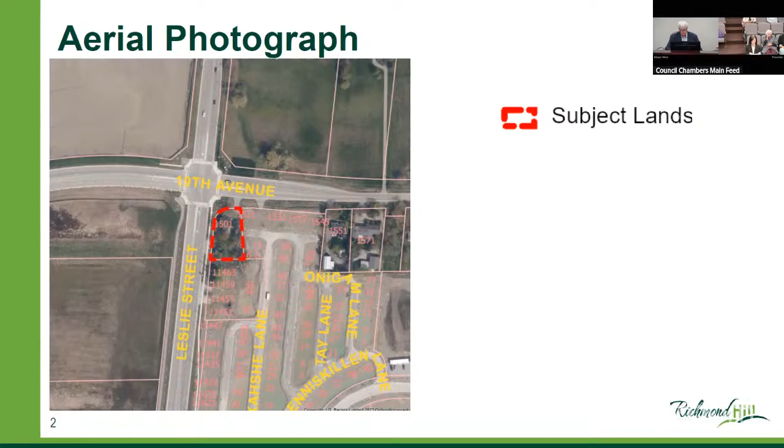The lands are currently designated Employment Corridor in accordance with the North Leslie Secondary Plan Area, which is intended to accommodate a range of industrial and office use developments.

However, notwithstanding the above, the North Leslie Secondary Plan provides for medium-density residential development. The applicable policies include permissions for a full range of residential types, including single detached, semi-detached, duplex, triplex, quadruplex, block townhouse, and back-to-back townhouses. Further policies within the secondary plan permit live-work build form within the mixed-use commercial/residential designation. With respect to current zoning, the subject lands are zoned agriculture, A1, under zoning bylaw 2523-86 as amended.

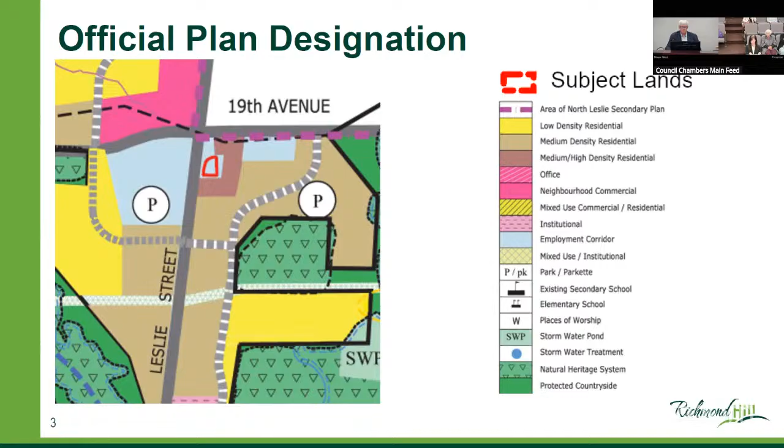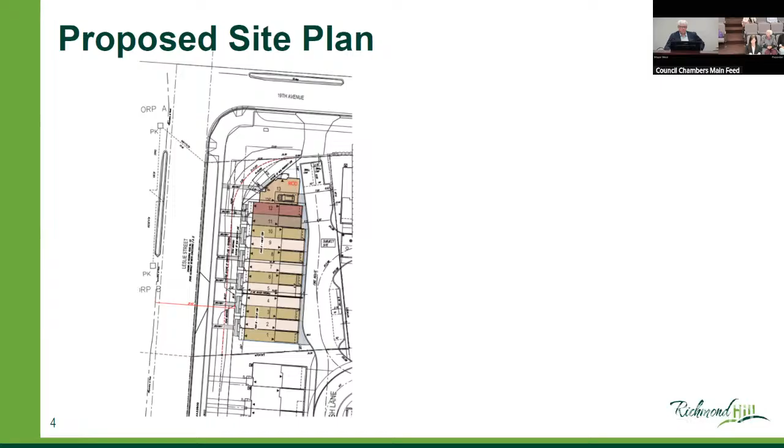Through these applications, the applicant is seeking approval to permit a medium-density residential development consisting of 13 three-story townhouse units on a private common element condominium road. Vehicular access to the subject lands is to be provided via a connecting driveway from the abutting Leslie Richmond Developments subdivision.

The applicant's official plan amendment application seeks to amend the policies of the North Leslie Secondary Plan Area to redesignate the lands to medium density, to permit medium density residential uses in the form of stacked townhouse dwellings that include live-work permissions, and also to increase the maximum permitted density within the medium density residential designation from 60 units per hectare to 95 units per hectare.

The applicant's zoning bylaw amendment application seeks approval to rezone the subject lands to Multiple Residential 4, RM4, as amended, with site-specific provisions to implement the development proposal.

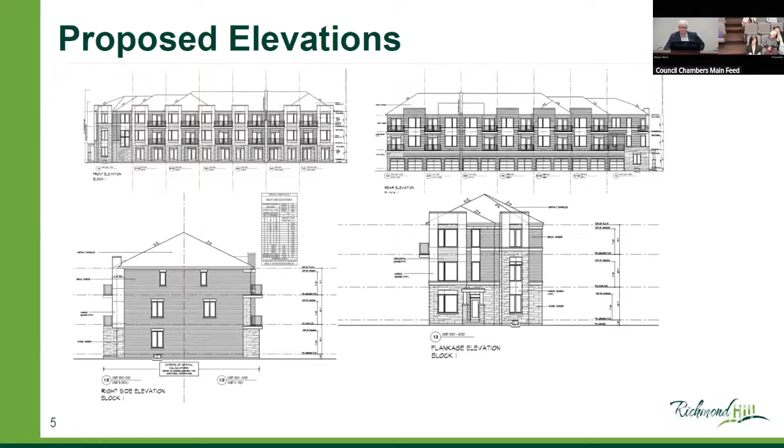It is noted that related draft plan of subdivision and draft plan of condominium applications have also been submitted in conjunction with the OPA and ZBLA applications. The proposed draft plan of subdivision, if approved, would result in the establishment of 2 separate parcels: 1 condominium townhouse block and 1 regional road widening block. The proposed draft plan of condominium, if approved, would serve to establish common element condominium tenure.

Staff have circulated the applications to internal departments and external agencies for review and comment. The purpose of the report is to provide council and the public with an overview of the applicant's development proposal, and it has been structured for information purposes only, with a recommendation that all comments be referred back to staff for consideration. Thank you.

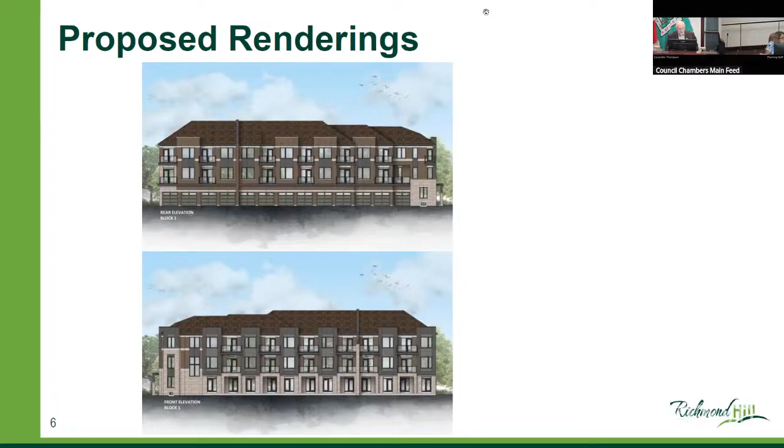Okay, thank you. Anybody else? Okay, seeing none.

I am a little concerned about the employment land issue, but can you clarify for me - in order for them to convert this from employment land to residential, they don't need to go through the region anymore because that's out of the question. So it's completely up to us then, is that correct? That is correct.

So the land across the street with the P on it, I assume that's something we're contemplating at some point, but it's actually designated as employment as well. The P on the west side of Leslie, that's where the community center is going to be. So that one's been considered, not going to be employment lands. The only remaining parcel is on the south side of 19th, a little further east. And that's not viable as a... okay. All right, that's fine.

Well, I appreciate the comments, I appreciate the input from you, sir. Thank you so much. We'll have this referred back to staff, and staff will continue working with the applicant to come up with something we can look at in the future. So we have a motion in front of us then - all those in favor, opposed - that carries unanimously. Thank you very much. The next item tonight, and the last item.

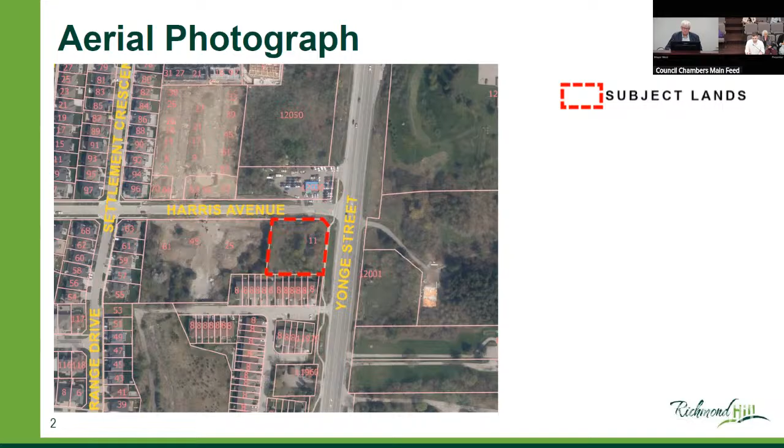The land supports an existing single detached dwelling, which is proposed to be demolished to facilitate the development. The surrounding land uses include an existing used car dealership to the north, which is subject to development approval for an 8-story mixed-use development, Summit Golf and Country Club to the east, existing townhouses to the south, and medium-density residential currently under construction to the west.

The lands are designated regional mixed-use corridor in accordance with the city's official plan. The applicable policies allow for medium and high-density residential land uses, as well as a full range of commercial, retail, and office uses. Development within this portion of the regional mixed-use corridor allows for a maximum building height of 6 stories with a maximum density of 2 FSI.

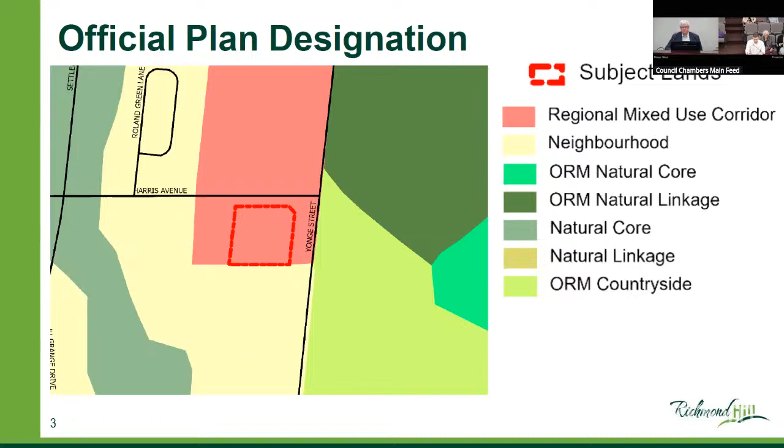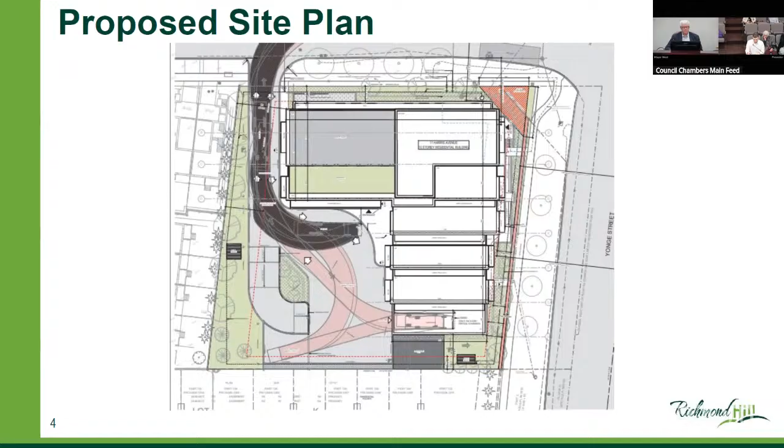Through these applications, the applicant is seeking approval to permit a high-density mixed-use development comprised of 10-story apartment buildings with 119 dwelling units, approximately 269 square meters of commercial space at grade, indoor and outdoor amenity spaces including a rooftop amenity area, and 3 levels of underground parking.

The applicant's official plan amendment application seeks approval of site-specific exemptions to the regional mixed-use corridor designation to increase the permitted building height from 6 stories to 10 stories and increase the permitted density from 2 to 3.3 FSI. The applicant's zoning bylaw amendment seeks approval to rezone the subject lands to multiple residential 1 zone under bylaw 23597, as amended, with site-specific provisions to implement the development proposal.

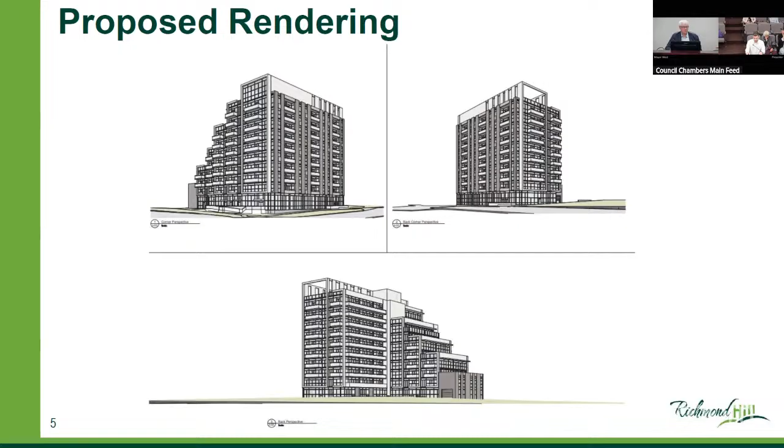Staff has circulated the applications to internal departments and external agencies for review and comment. The purpose of the report is to provide council and the public with an overview of the applicant's development proposal, and it has been structured for information purposes only, with the recommendation that all comments be referred back to staff for consideration. Thank you.

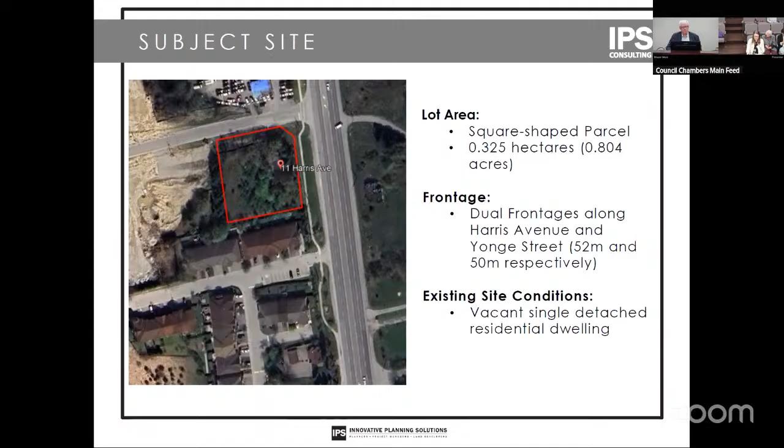I wanted to give you a sense of the surrounding area. I know this is a busy slide, so I just want to highlight a few aspects. First of all, right across Harris Avenue to the north is 12030 Yonge Street, which council approved for an 8-story mixed-use development last year. There are also a number of new townhouse developments down Harris Avenue, which are also under construction. And to the south of the site is an existing townhouse development, which is really the only real neighbors right now that the site has.

There's also commercial plazas to the north and south, both of which have important amenities like grocery stores, restaurants, banks, and they're both about a 15-minute walk from the site. There is a Viva bus stop at Yonge and Jefferson, which is less than 300 meters from the site.

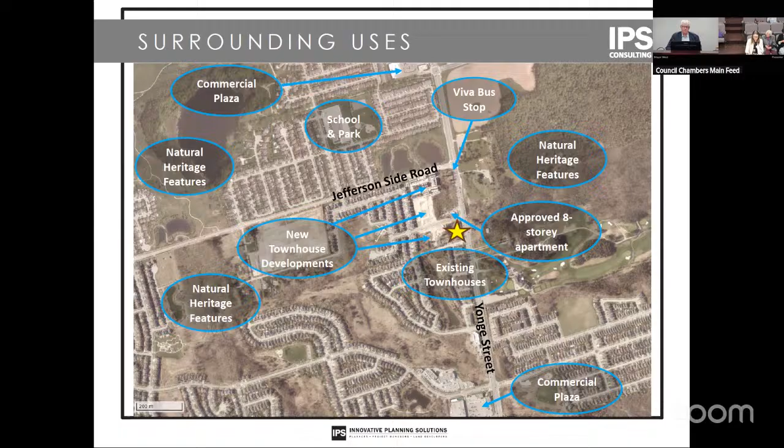So the development concept, as mentioned, is a 10-story mixed-use condominium building with 119 residential units and 269 square meters of ground floor commercial space.

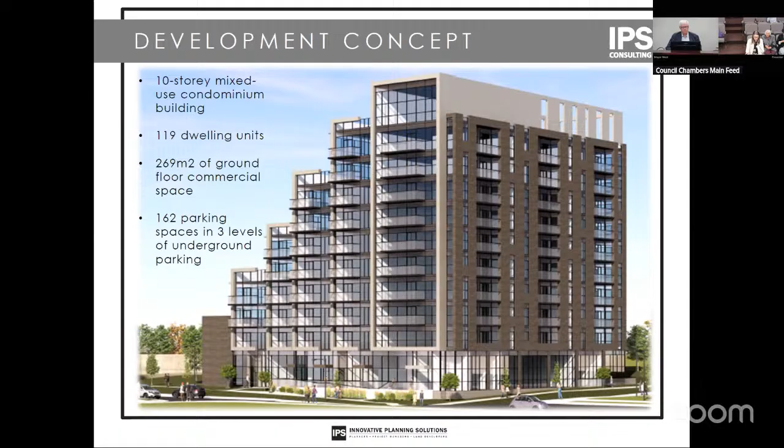This rendering shows the view if you were looking from the middle of Yonge and Harris intersection. There's also 162 parking spaces proposed in 3 levels of underground parking.

This slide shows the site plan with the proposed landscaping. The building is designed to be loaded onto the corner, with larger setbacks and landscape buffers as you get closer to the townhouses to the south and west. The site access is from Harris Avenue and opens into a large driveway to allow for loading and unloading.

We are proposing to have the commercial area fronting onto Yonge Street to activate the street. There is an existing sidewalk with a landscape strip on Yonge Street, so we would be enhancing and improving that area, and we also have a required road widening dedication there. Along Harris Avenue, we're proposing an amenity space as well as residential units with terraces at ground level. There is not an existing sidewalk on Harris Avenue, so we would be adding one.

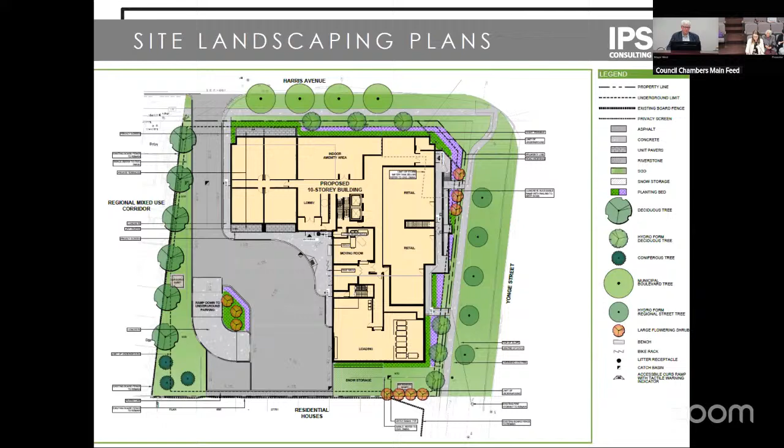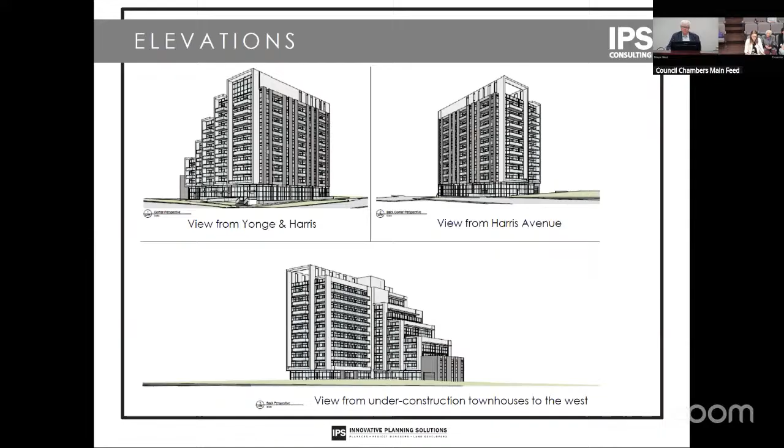This slide shows the elevations from different viewpoints. Again, this emphasizes that the massing is concentrated at the street corner and that the building is designed to frame both streets. There are step backs to the south to meet angular plane requirements for the existing townhouses, and the building is L-shaped to ensure appropriate setbacks and angular plane from the under-construction townhouses to the west.

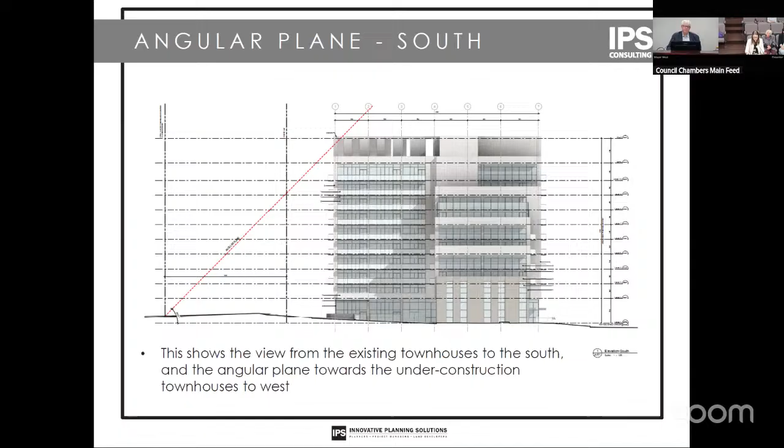This elevation shows the view from the townhouses to the south and the angular plane towards the under-construction townhouses to the west. Because the building is set back so far from the western property line, that side does meet angular plane despite not having the step backs you see to the south. Although it appears there's a corner that's encroaching, that's actually just a noise wind barrier on the roof deck, not an actual floor.

As was mentioned, the site is designated regional mixed-use corridor, which permits the use but not the proposed height or density. That's why we're requesting an official plan amendment.

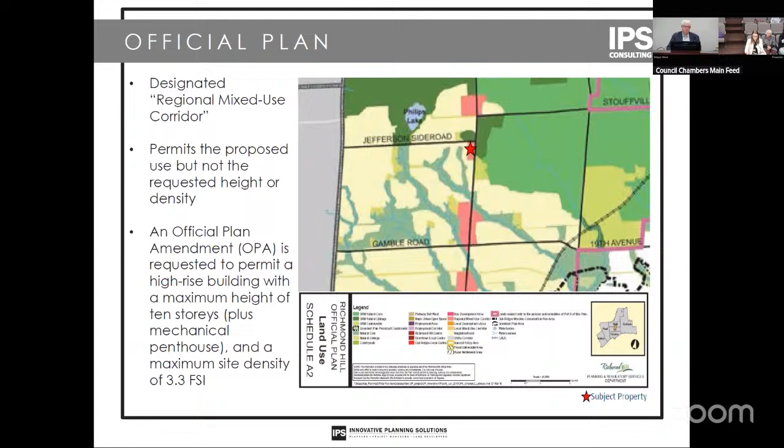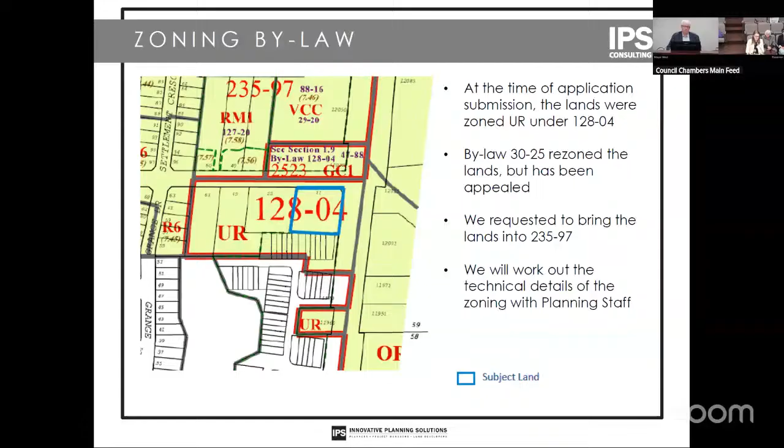Also, just briefly on zoning: at the time of application submission, the lands were zoned UR under bylaw 128-04, which did not allow the proposed use. I understand the lands were recently rezoned, but that decision was appealed. Giuseppe and I had a conversation - we'll need to work out the technical details of what zone it will be in the future, but we'll work with planning staff on that. Really we just want to get into the details of the site-specific request so we can figure out the actual zone later.

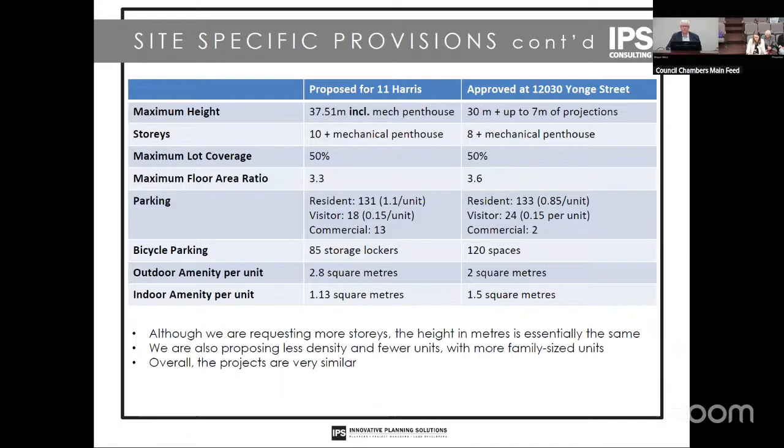So just in summary, the lands are, as mentioned, designated for a regional mixed-use corridor. Yonge Street is a regional transit corridor, and the site is very close to a Viva bus stop. I know the city is looking to provide transit-supportive densities near Viva bus stops. However, as I mentioned, development in the area can only happen on the west side of Yonge due to the Oak Ridges Moraine on the other side. Really, in order to provide those densities, there just has to be more density on this side of Yonge, and I think that's why you're seeing proposals coming in for a higher height than what is allowed by the official plan.

So we feel that the development is in line with what was approved and is also compatible with the area. Thank you so much. Okay, thank you.